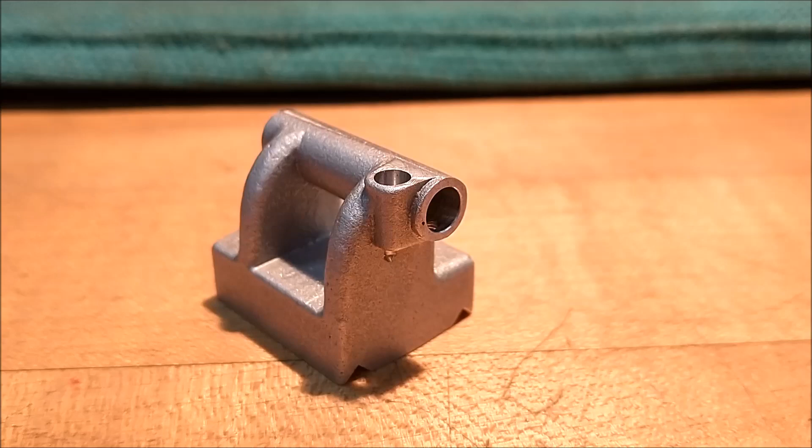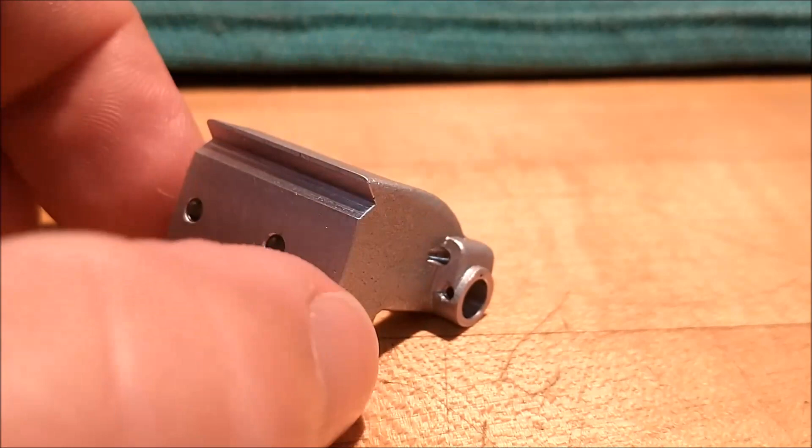Well, in the quest for perfection on this particular model, I must admit that the longer I look at this piece, the more that little detail right there grinds on me. Just can't live with it.

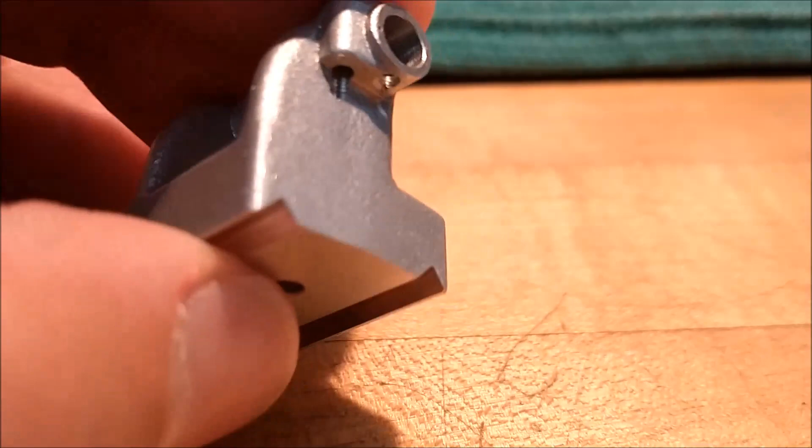It's killing me, that little half a hole right there. I said, yeah, we're going to fill it in, put JB Weld on it, fake it. You'll never see it when you paint it. But just like anything else you do, if you're going to do it right, the more I stare at that, it just tears me up.

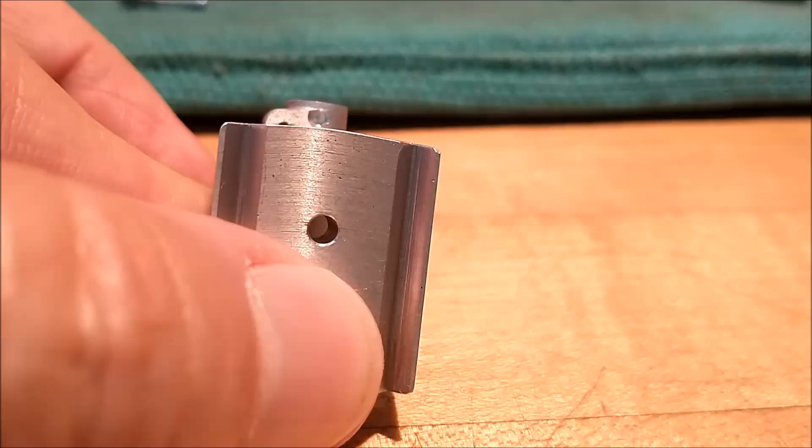So here's my plan. Looking at the face of this thing, this is a pretty good crown right there, so I think I'm going to make that flat. I am going to mill away the face of this part until that half hole feature goes away. That's step number one. Then I'll take a file and put all these casting radiuses back on it and sandblast it to make it look like a casting, but that little ugly right there is going to go away. That will not be on my model.

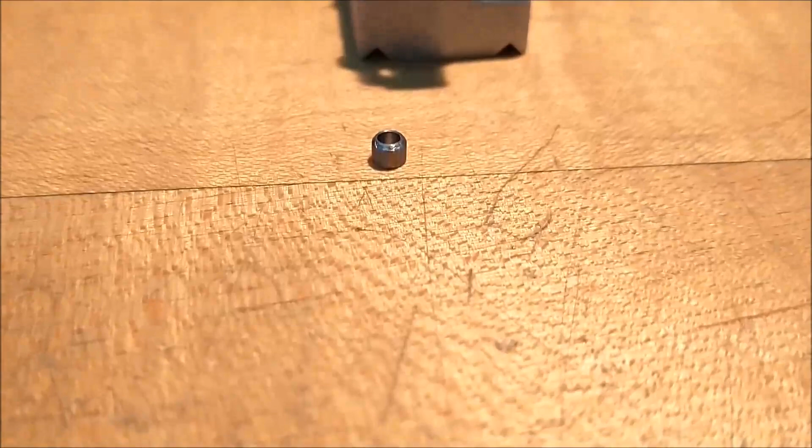I can't have it. And inspired by some of your comments, yes, I will change this little washer guy right here to brass. And I do believe I'm going to continue this bore all the way through and knock the threads out on the bottom, so there will be two of these. The bottom one will have threads, the top one will not. And when you tighten the handle down, it'll pull the two together and pinch.

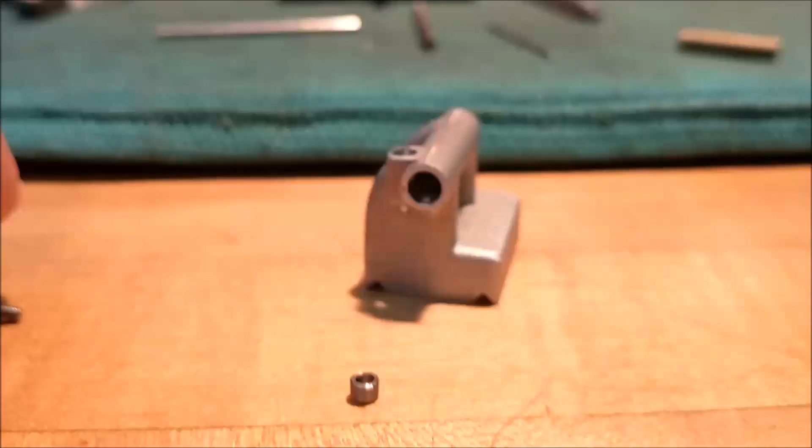So let's put this in the machine and see if we can recover.

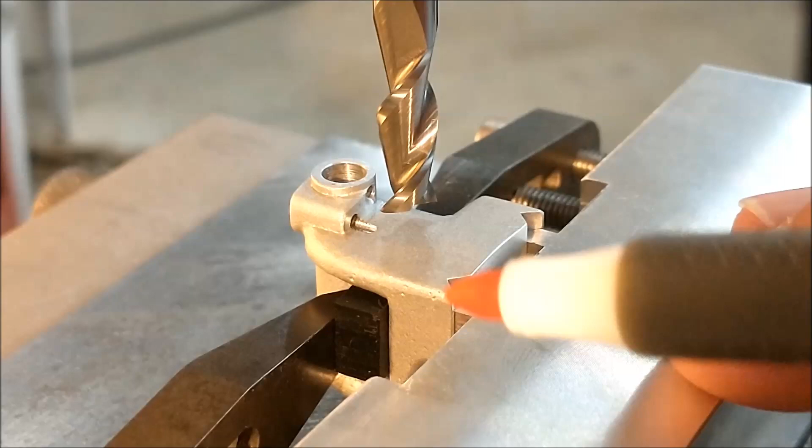Now, the whole idea here is to keep it looking like a casting, so this surface is coming off. Minimal, of course. I want to make contact with the bottom and contact with the side, and take only enough to make that scallop go away. That's going to bug me forever if it's there, so here we go.

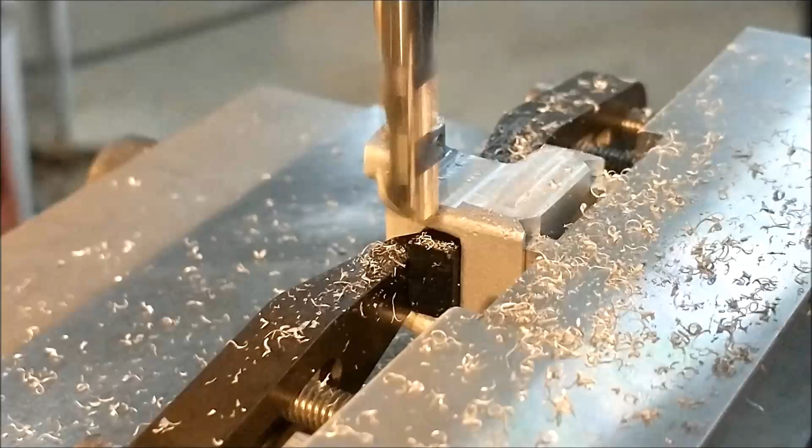It's a good thing I have the magnification of this camera, because it is almost impossible to actually look straight at that and see those remnant threads right there. Let's take another 5 off of that surface and let's see what happens.

All right, 5 it is. What you're seeing now is the bottom half of the hole, the step from this wall to that wall. So this wall has got to be kissed. You can get the cutter over there and just remove half of the Sharpie marker thickness. Yeah, in my dreams. And then we're going to jump over to this side and just take this land out over here as well.

I am a-okay with this fix. Sometimes you just got to make something before you can make something better. Looks like a crime scene now, doesn't it? Maybe that'll be my thumbnail - horrific shop injury, I'll get a million hits just from the title.

This is straight out of the machine. There has been no handwork done to this as of yet. And I think that looks a lot better with that front ugly gone. I do have to reblend all these corners and finish blending that out right there.

And I think we're going to be back on track. Additionally, those threads are going away. This is going to be a two-sided brass plug, and it's going to squeeze from the top and bottom. I just think that's a better way to go. So thank you to everybody that pushed me into that - you were right, and I cheated the first time around because I was hot and short on time.

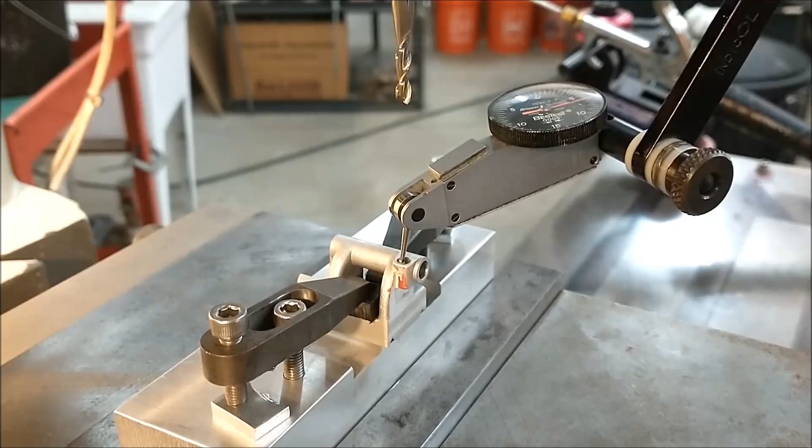I'll be back. Let's take the counter bore all the way through to the bottom here without going further down, because then we got another ugly we got to take care of. Pick up the hole like any other hole. Once you got it zeroed out, good to go. I'm going to creep down on this very slowly until I break through the bottom.

With the assistance of a mirror, I can keep track of this feature as it develops. Sorry that's not camera angled, but it's got to be for me this time around.

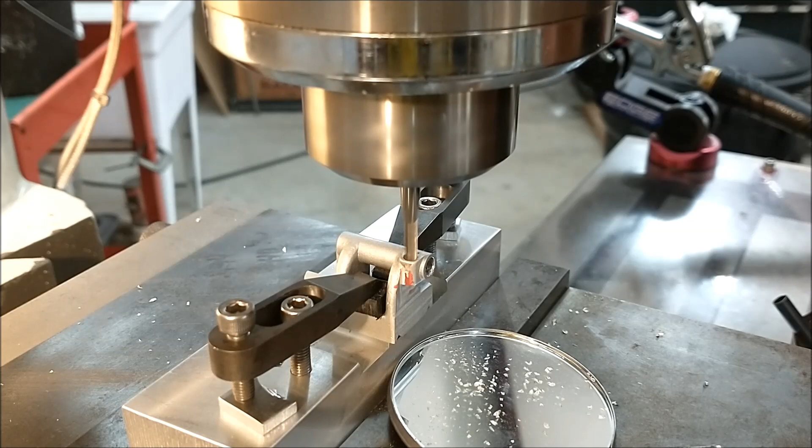All right, last minute change in my thought process. I did not break all the way through. I left about a 10 thousandths land in there, so if I ever remove the handle, that brass slug does not fall down into the machine, the lower half. I think you can see it right there, it's a pretty good angle on it. The other hole you see is the keyway screw hole for the spindle.

If this proves to be a problem, I could just get back in there and knock that out, but for now I'm going to leave it just like it is. Let's clean it up with a file, and I'll show you what it looks like before I blast it.

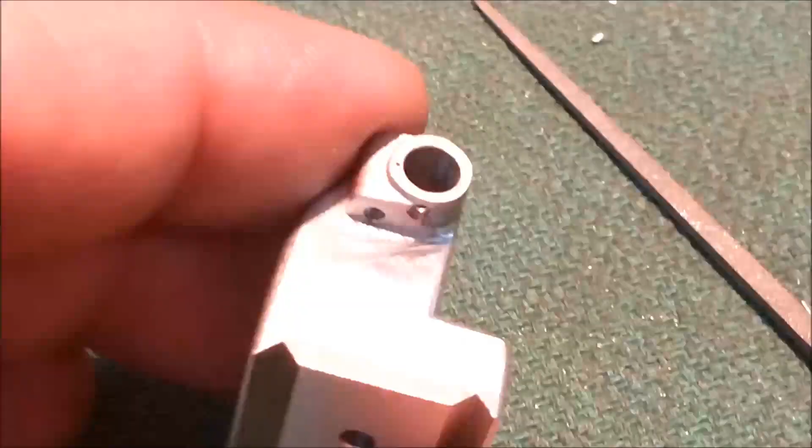Real time, 5 minutes, 44 seconds. I am midway into the re-radiusing of this little casting right here, and I think once it's blasted, it'll look exactly the way it should. The reason for this little segment right now is that part in the center that I'm taking out, I'm doing with a modified square file.

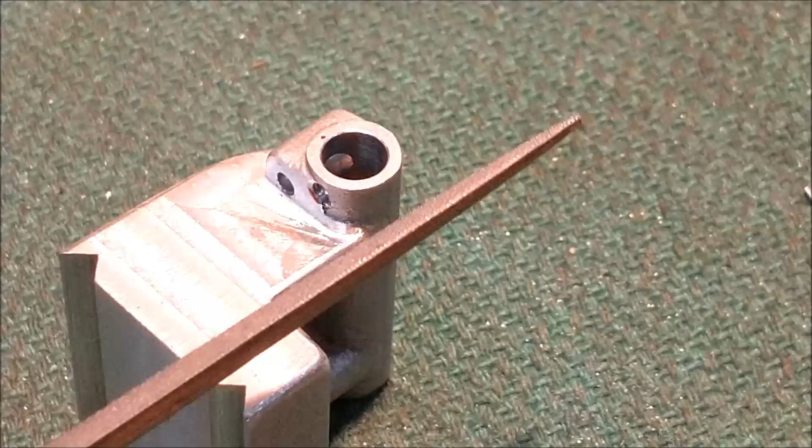The only modification is that I've removed the teeth on the downside, so I can rest this file on this surface as I contour that material off. So you will see scratches on this surface, you can see the scratches there. But I'm not really removing anything because the teeth are gone from that file.

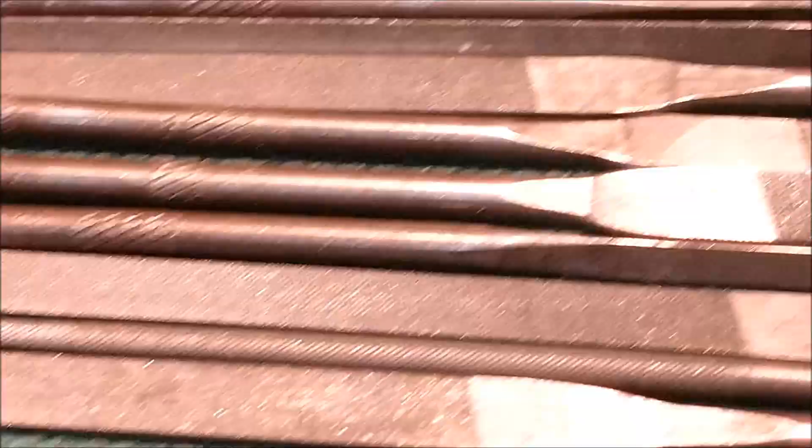That's that file on the side, that side of the file. Okay, it's a good trick. Don't be afraid to modify your files. I don't think there is a small file that I have that hasn't been tweaked in some manner. Make the file work for you.

Now, as soon as that little ugly's gone right there, I will blast it and show it to you. Prior to the blasting operation, all of the surfaces that you do not want to damage, plug them, cover them, do what you got to do.

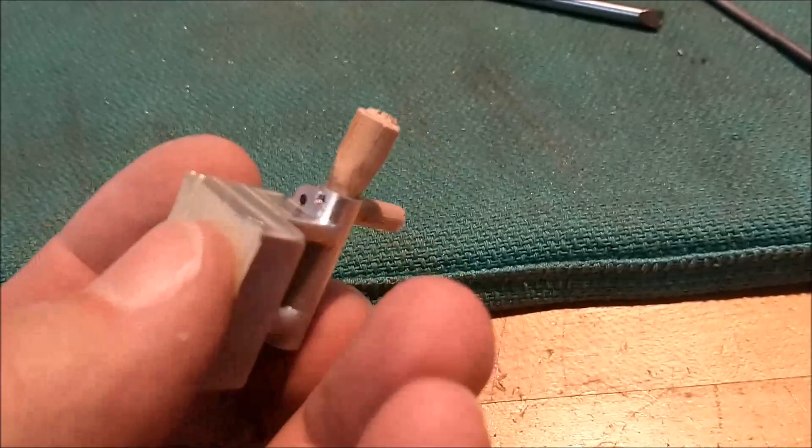I'm going to turn the pressure down just enough to wipe the file marks off of this, and this is going to look exactly like a casting when it comes back out. Very important, don't forget to plug the things that you do not want to see damaged.

Following the blast operation, everything looks like it should. All the radiuses blend very nicely, all the surfaces are good and clean, and the ugly is gone. Big plus, I was not okay with that.

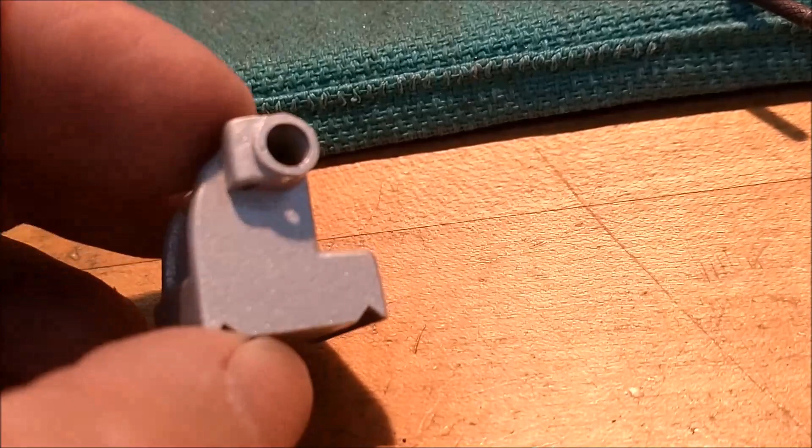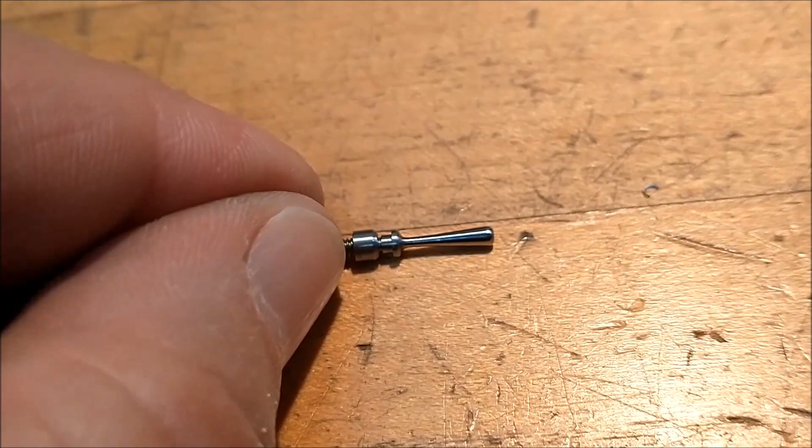All right, let's make some blast plugs, let's make some brass plugs and finish this up the right way. That'll even bend the handle. And as of yet, it is still straight. I'm hoping that it bends right on the neck down section and does not snap off.

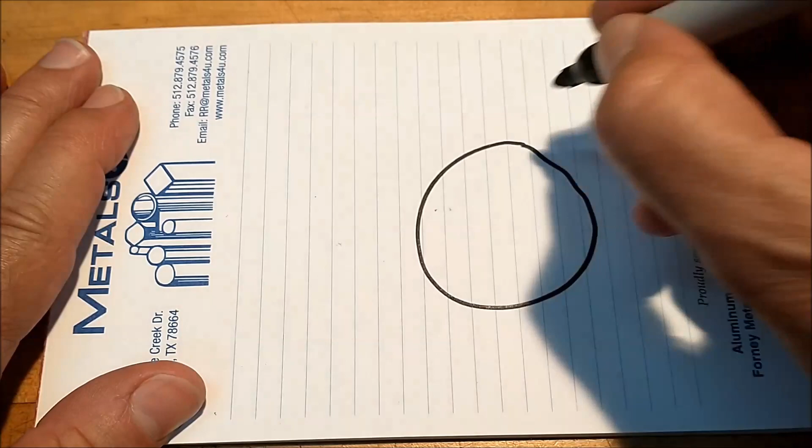Okay, it is time to figure out how to put the little scallops on the slugs. You have the cylinder of your spindle of your tailstock, and the slugs that we want are probably going to hit something like this.

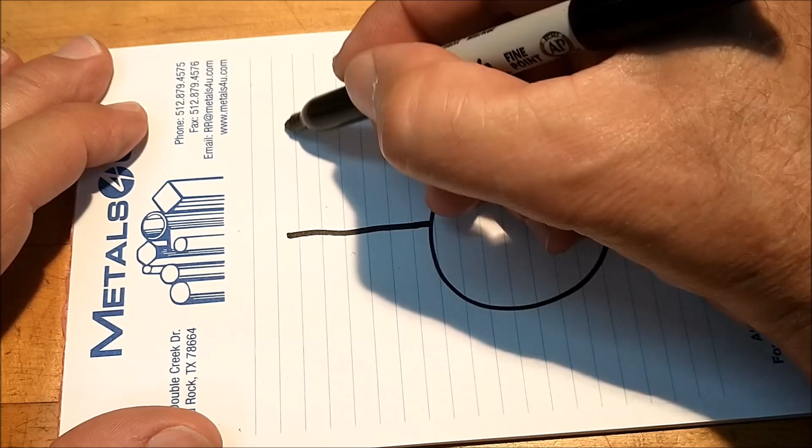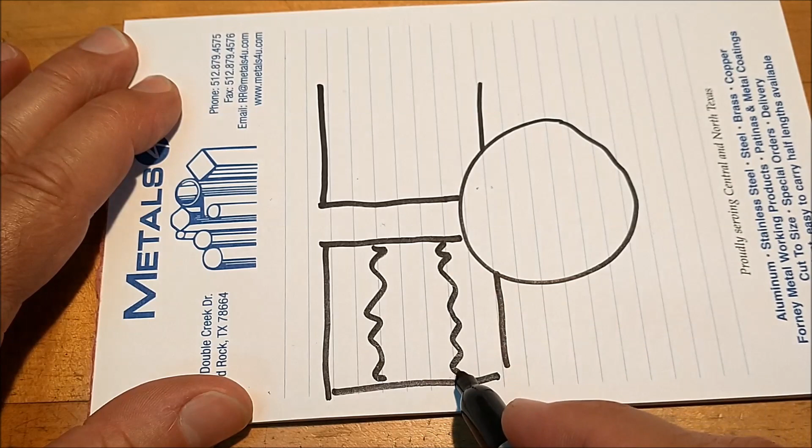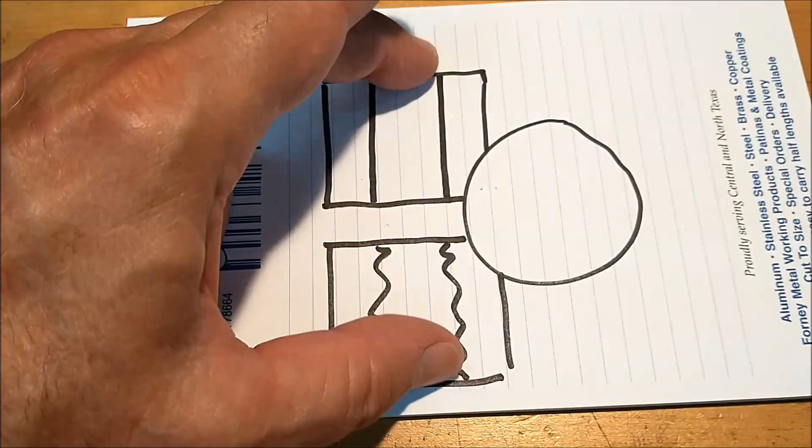Bottom one's got threads, hopefully nicer looking than that, and the top one is a through hole. So as you drop the screw through here and it engages the bottom, when you tighten it, it squeezes, therefore pinching in two places here.

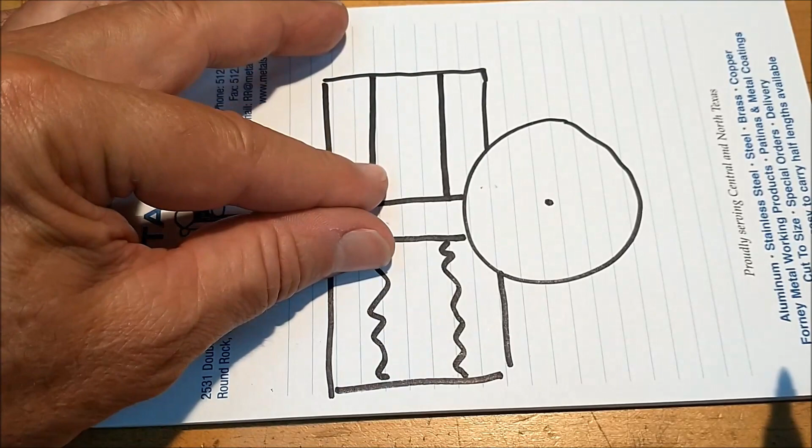Technically the deflection goes that way, so depending on how nice and tight this fits, you're going to get what you get. How to position the cutter to make these cuts accurately? You need to know the gap between the two slugs, because you don't want them coming together. It doesn't tighten if they're coming together, so you're going to leave some air in there. I'm going to leave 3/4 of a millimeter, 0.030, give or take.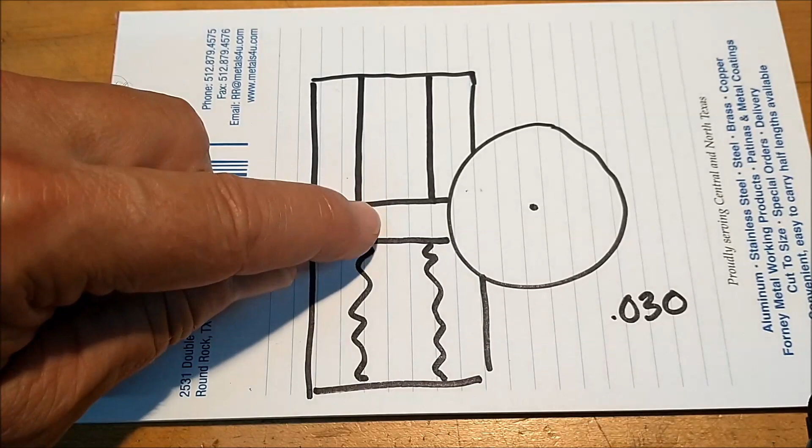And that is 15 to the top, 15 to the bottom. So realistically, the center line is there. All right, knowing the radius of the tool that we're going to use to do this, this is an 0.093 radius.

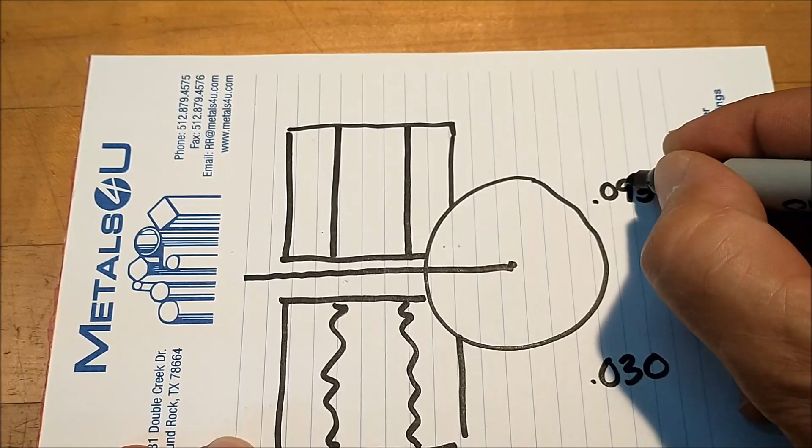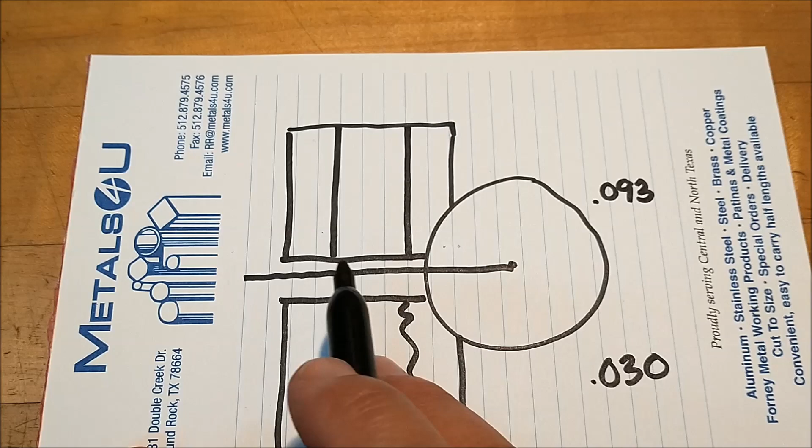Minus the gap. Put half the gap on top, half the gap on the bottom, right? So we're going to use 15 as the value either way. 15 from 93 is 78.

Here to here. And that is almost exactly 2 millimeters. Pretty close. How do we set that 78?

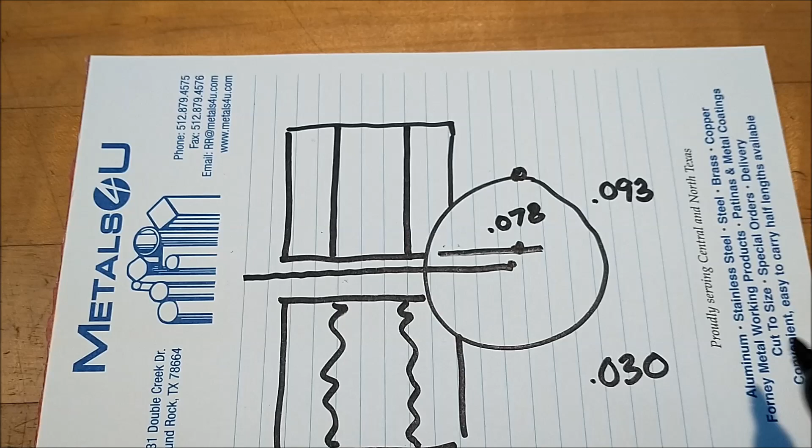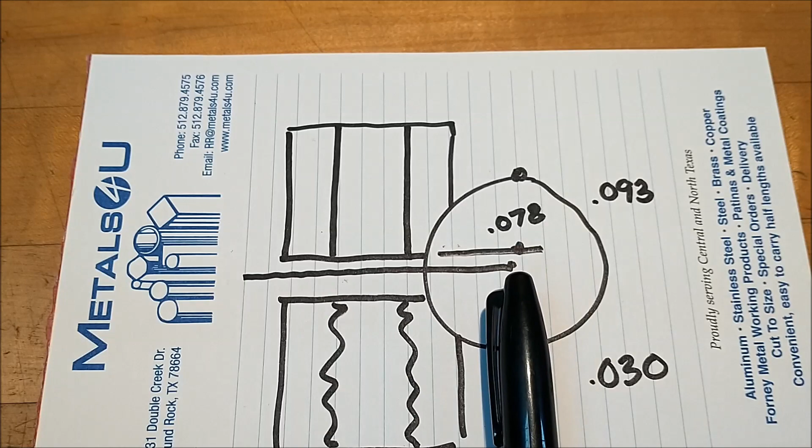Well, that's a piece of cake. You take your cutter and you run it along the face of your part. That is now 0 because it's right there. And then you just move in 0.078. So now this height is set.

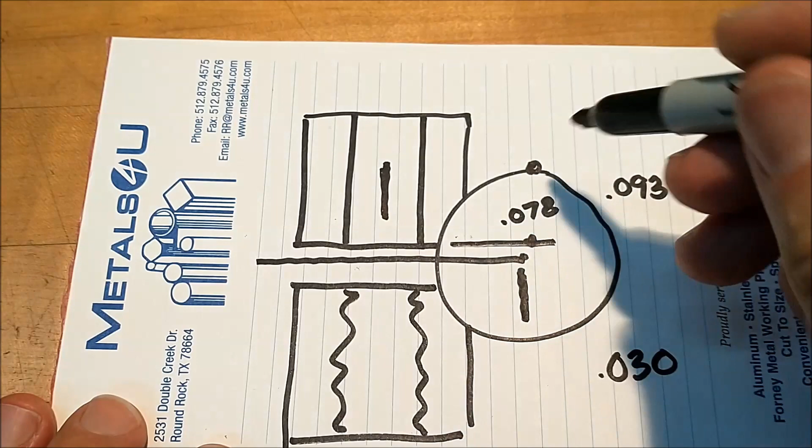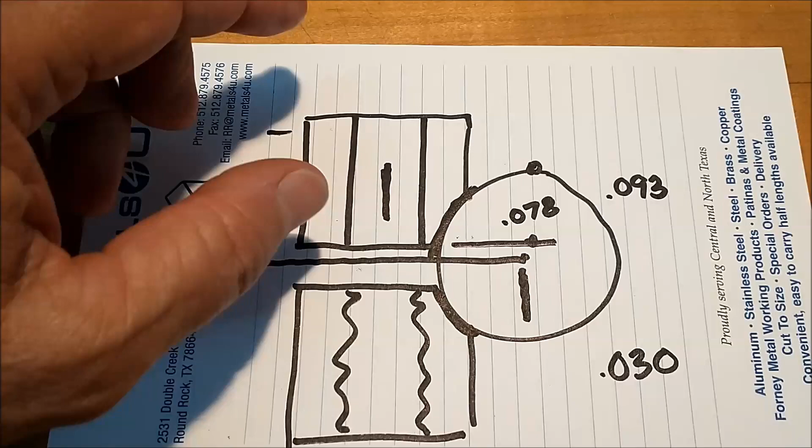We're going to do it twice, and then it's just a matter of figuring out how long these parts are going to be. Go to the machine and do it.

Okay guys, off camera, I swept either side of this with the indicator to come up with my center line. I'm going to kiss the end of the part now with the cutter. Get my other center line.

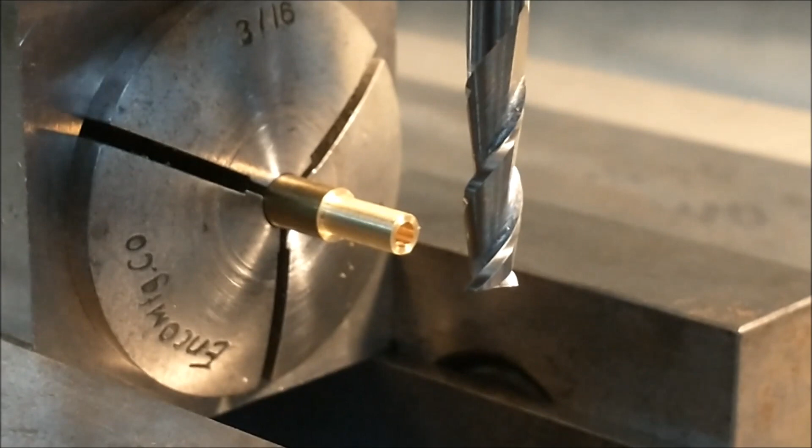And you can see it. That is what's going to bite down on the spindle. It's a whole lot more surface contact than an angle or point or whatever. So that's going to really work out well. Flip the part around, do the exact same thing to the other side.

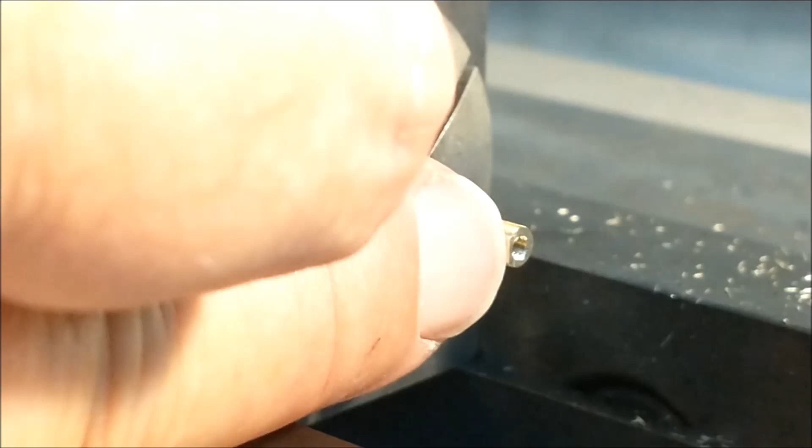That's the working scallop right there. I'm happy with the size of that. If it were any thinner to the thread, the pressure might have a tendency to collapse the thread and ruin the fit. Well, let's take a look at how it fits in the tailstock.

Okay, just for sake of illustration, you can see the cutout inside the tailstock right there.

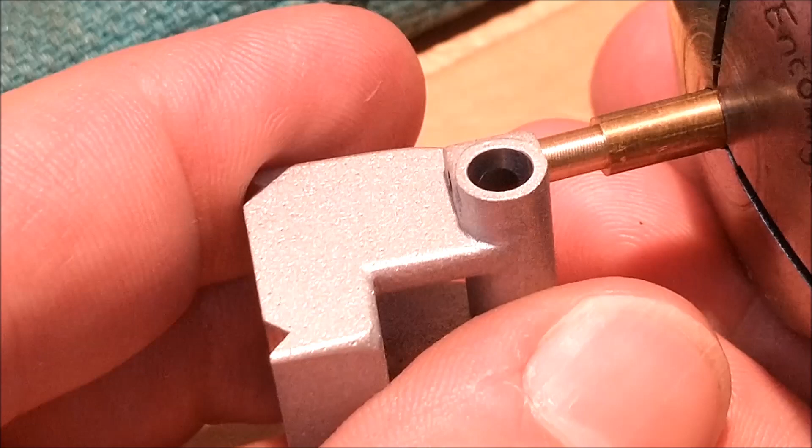Okay, there you go. See how the radius matches the bore? And when you tighten it down there, both of them are going to come together.

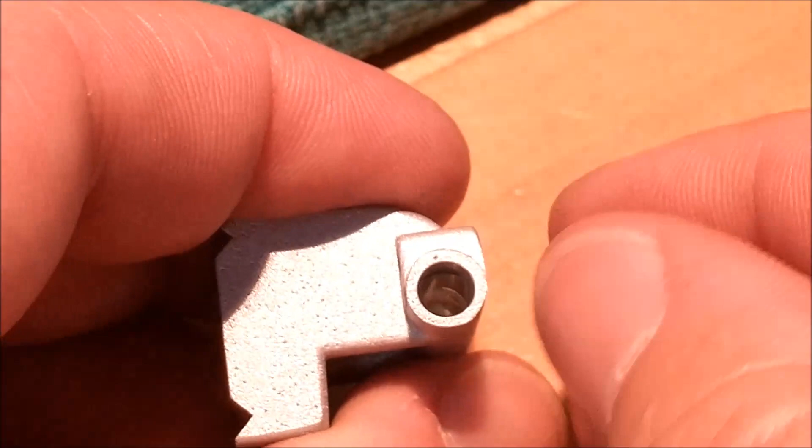Knowing that the hole itself is 188, you have 93 to here, plus whatever you have on the top and bottom for the overall length of the slugs. This is dealer's choice right now. I'm going to make the bottom about 100 long. I'm going to make the top about 130 long. We'll see how that works out.

Simple parting operations, everything else is done. And that is hard to shoot.

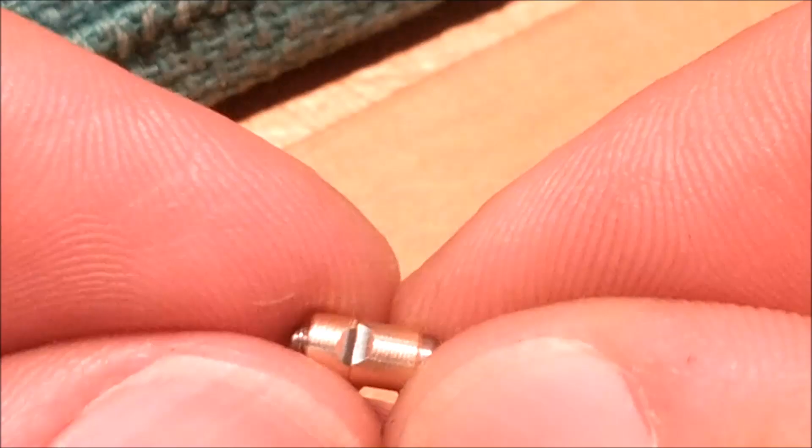Okay, now the concept behind the split bushing. And forgive it, looks like I'm shaking here. Believe it or not, it is incredibly hard to stay perfectly still at this magnification.

When I unloosen the handle, you can see the two scallops that will match the radius of the spindle. And when the handle is torqued down, those two halves will come together, pinching the spindle.

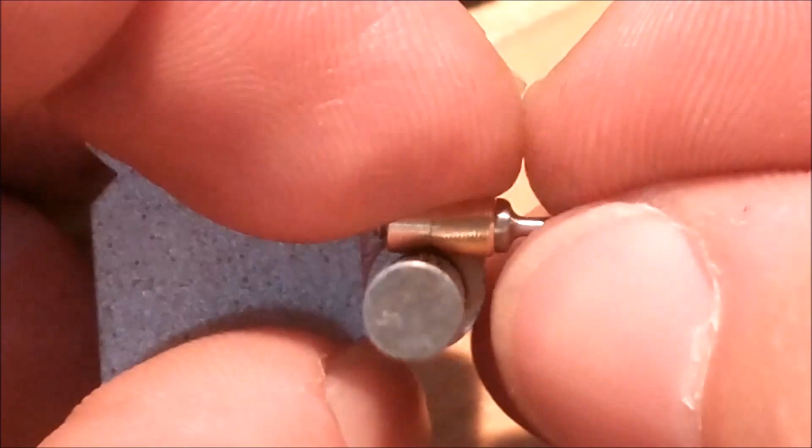In that hole. That way. And if all went well, it should fit, it should be flush.

Now doing this, it is a little tricky. You can put the whole thing in as an assembly like I'm going to do right here. But getting this thing down in here, you better make sure that these pieces are clocked correctly or you're never going to get it in.

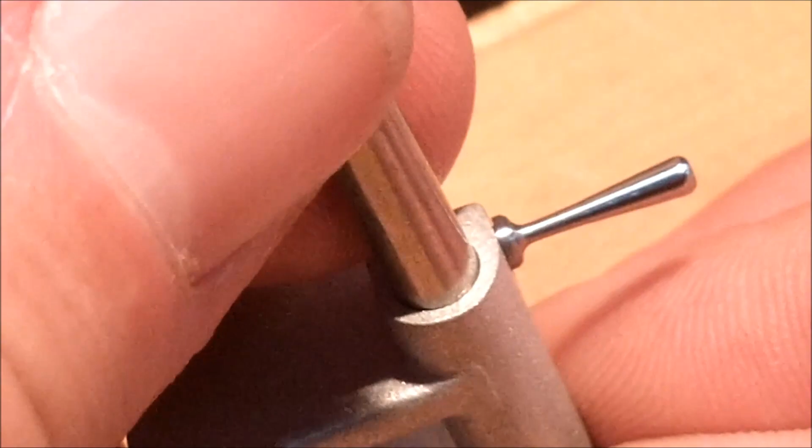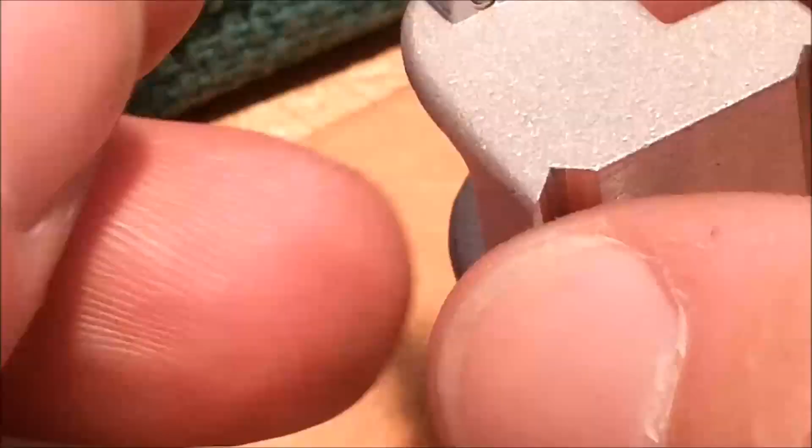Alright, let me mess with it off camera for a minute. I'm going to put the bottom one in, move it into position. Top one should be easy. So let's do the bottom one first. Let's do it on camera, why not?

Alright, nobody's that lucky. That went right in the first try.

This is also the difficulty you'll have if that slug is too long.

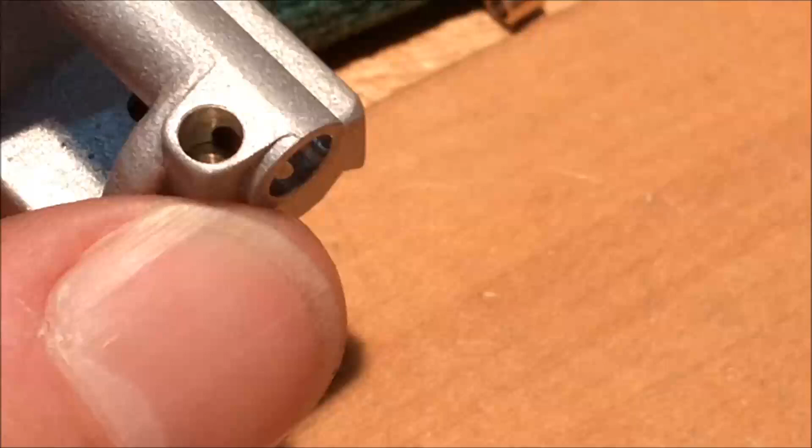Man, this is rough, people. There we go.

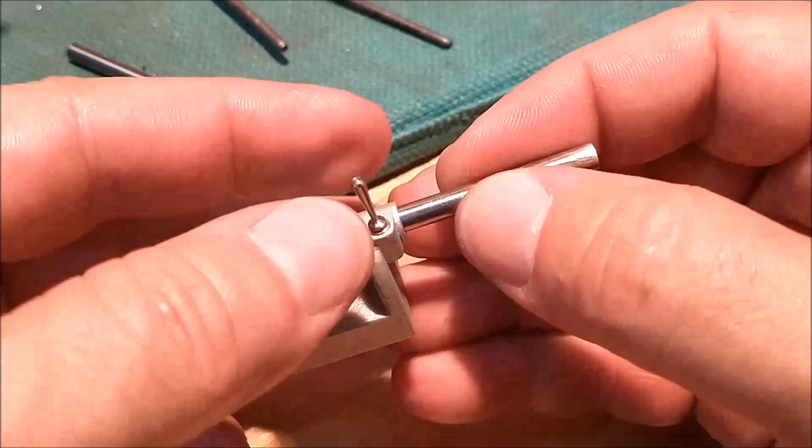Afraid to let it drop out. I may never get a clock back in there. There you go.

It is time to mark the handle and figure out how to bend this handle. I'm going to make a couple of small brass helper pieces to act as guides so I can hold on to that thread, heat it up, and bend it. I want the handle about 30 degrees that way and about 30 degrees up.

That was time well spent. I like that. All right, let's bend that handle.

Just as an installation side note, when you're doing something like this and there's only one way that this goes in, I'm going to intentionally throw it out of rotation and drop it in the hole. At least that's the plan. There you go, I'm going to throw it out of rotation and drop it in the hole. You can see how much higher than the hole it sits. Even with pressure on it, it doesn't go in.

As you spin it, it will find its seat. There it is. Let's pop it out, see what that looks like.

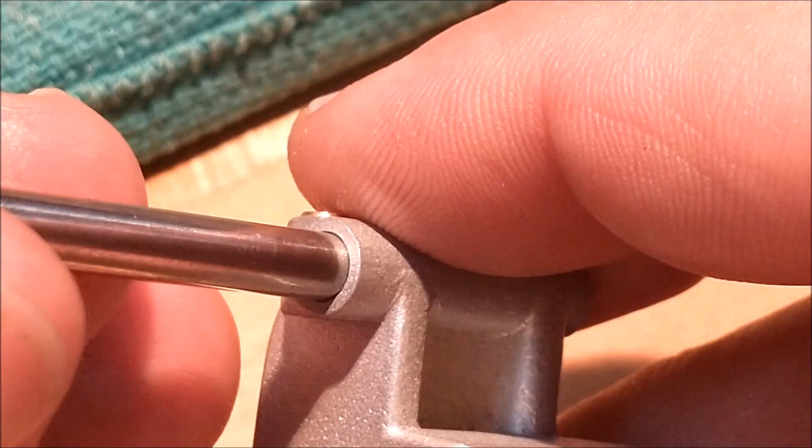Okay, you can see they're clocked correctly, but without resistance on it, it drops down. Cool. Okay, confirm you have your rotation correctly by spinning the part. Watch for it, the lowest spot in the installation, and then you know what you got.

It would be a shame to have this thing out of sequence, bend the handle, and then find out you weren't on the low spot.

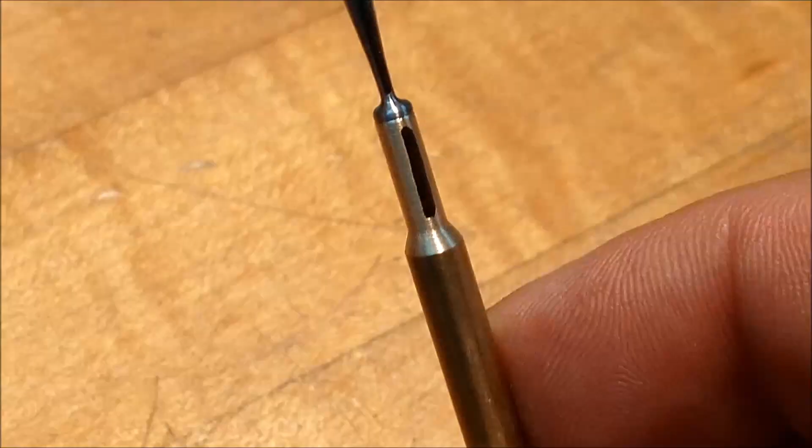For the bending operation, I put a black reference line on the handle when the handle was in position, and that is the direction that I want to bend to. So there's also a black line on this arbor. I will squeeze this in the vise accordingly and just simply push in the direction of the line, and the clocking should be spot on, with any kind of luck.

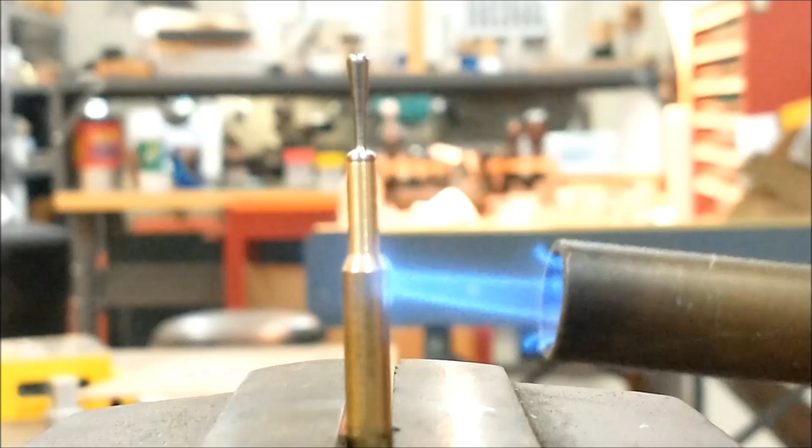Let's do it. For a bending operation like this, the one thing you will notice is that any peripheral contact with the part is going to suck the heat right off the part. So the brass nest that this handle is sitting in, I'm going to preheat that first so that I can maintain as much of the heat in the part as humanly possible.

Now, believe it or not, every time I put that top cap on, you can see that the red goes away from the handle because the heat's going right up into that brass and consequently right into my hand. So that is really hot. Going to step over to the lathe, put a couple of relief cuts in it like a heat sink, and maybe that'll make a difference.

Do not push this. When this part is glowing red, that's when you want it to move, and just put enough pressure on it to let the material tell you that it's moving at a good pace. There's the cuts.

Heat everything back up, bottom and top and the part. Take your time. Once that starts to glow red, don't melt the part, just get it red enough that it's going to cooperate, and all should end well.

All right, we're going to call that a win. That handle is exactly where I wanted it.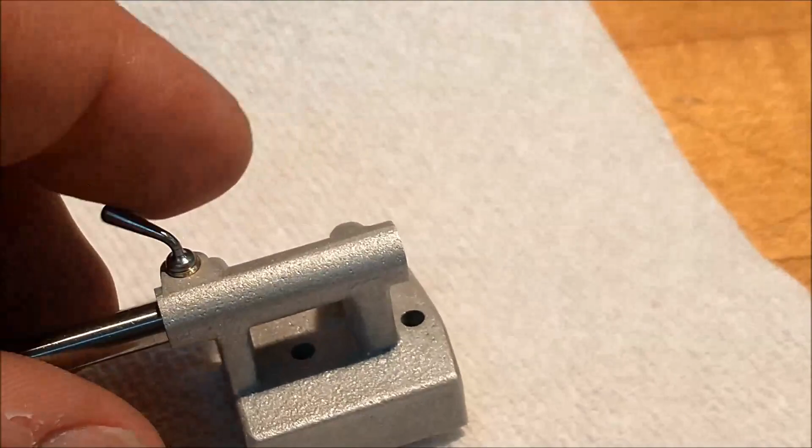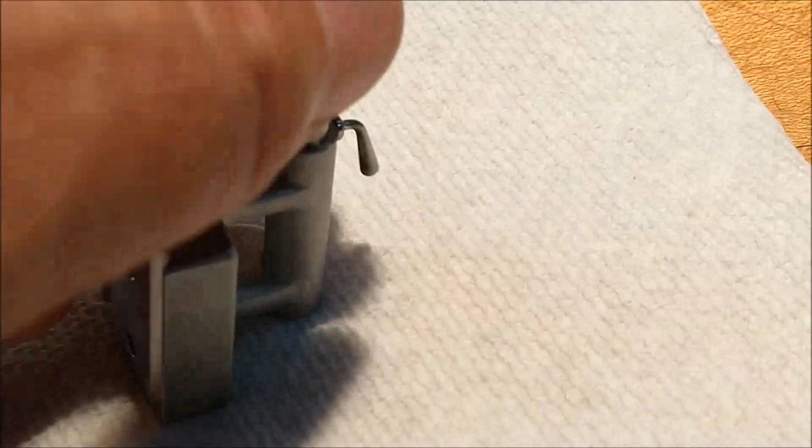And it's not going to go back in with one hand, that's for sure. Anyway, there you go, guys. That is complete.

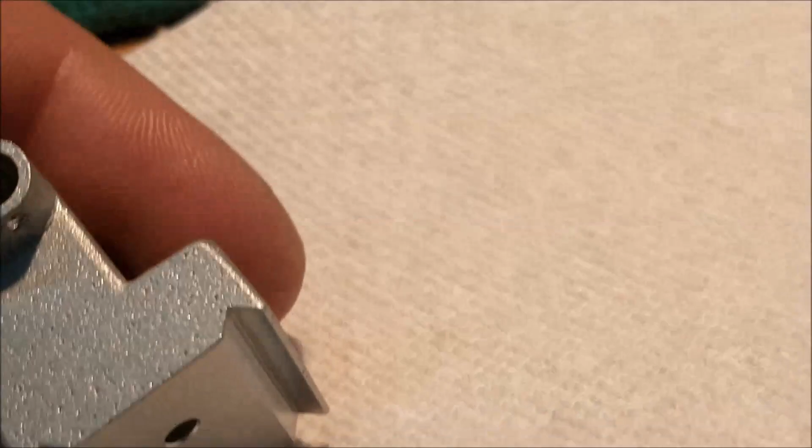Brass bushings on the inside, the ugly on the front is gone. The radiuses, it's all blasted. Looks like a casting again. Now I can sleep. I was just not happy with the way it was before. And you know what? If it bugs you, go back and fix it.